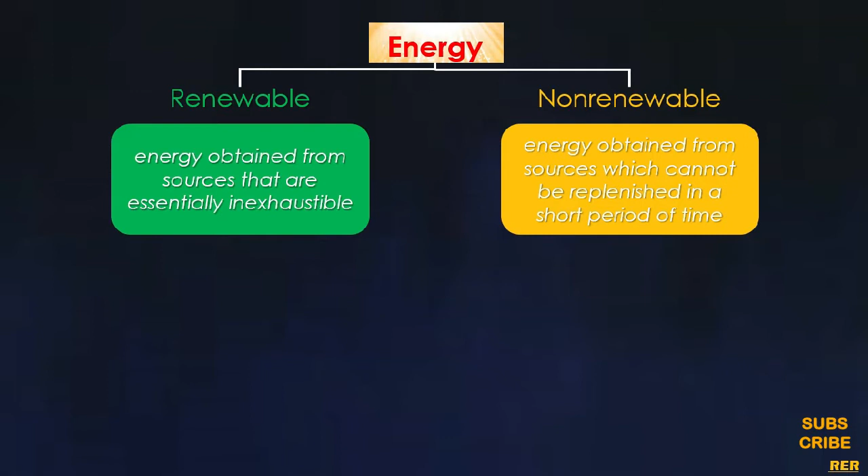Non-renewable energy resources are further classified as nuclear and fossil fuels. Nuclear energy is the energy stored in the nucleus of an atom, whereas fossil fuels are further classified as natural gas, oil, and coal.

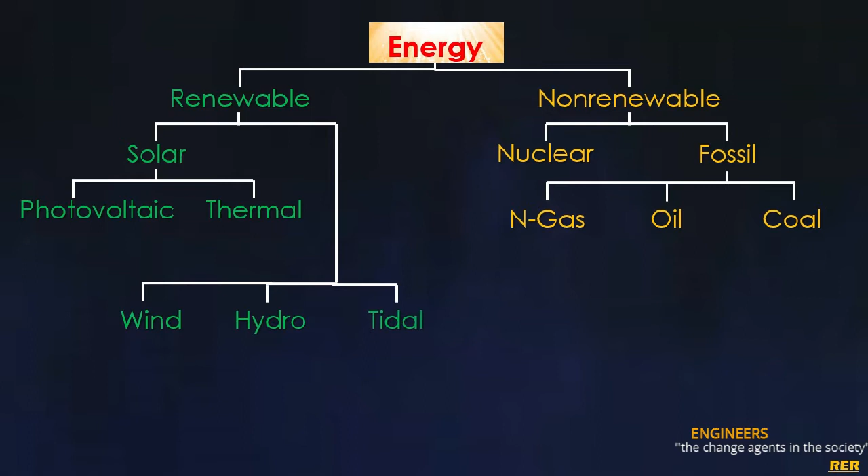Renewable energy resources are further classified as solar, which is subdivided into solar photovoltaic, which is the direct conversion of solar energy into electricity, and solar thermal energy; then hydro energy, the energy contained in the water; wind energy, the energy contained in the wind; tidal energy, energy associated with the tides of the sea; then biomass energy, and geothermal energy resources.

We can say that all forms of energy are forms of solar energy, less geothermal energy and nuclear energy, because these are the sources of energy which are associated with the energy stored in the nucleus of an atom. Other than these two energy resources, nuclear and geothermal energy, all forms of energy are solar energy.

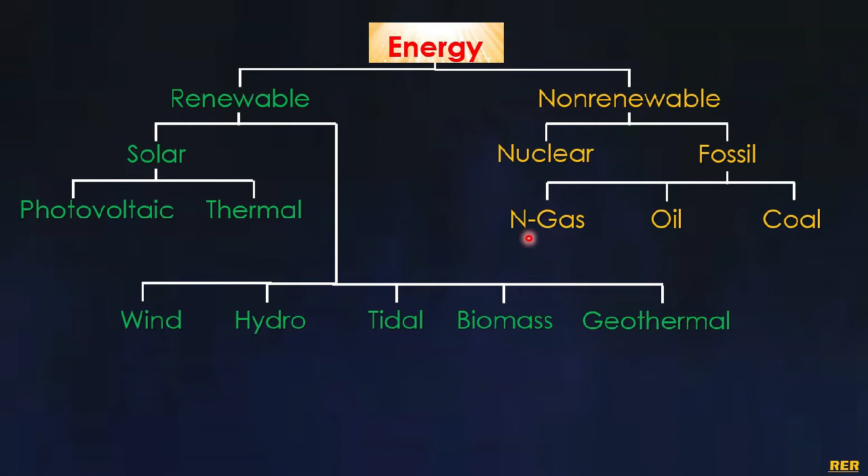Fossil fuels are also a form of solar energy because these are the old deposits of biomass which are buried deep in the crust, and because of the excessive temperature and pressure these are transformed into natural gas, oil, and coal.

Now talking about the history of energy usage. At the beginning of human life, our ancestors relied on renewable energy resources; humans lived on solar energy stored in food and other plants. They ate fruits, vegetables, and animals. Then they started burning wood for cooking food and heating purposes. So we can say before 1880 their reliance was on wood for energy.

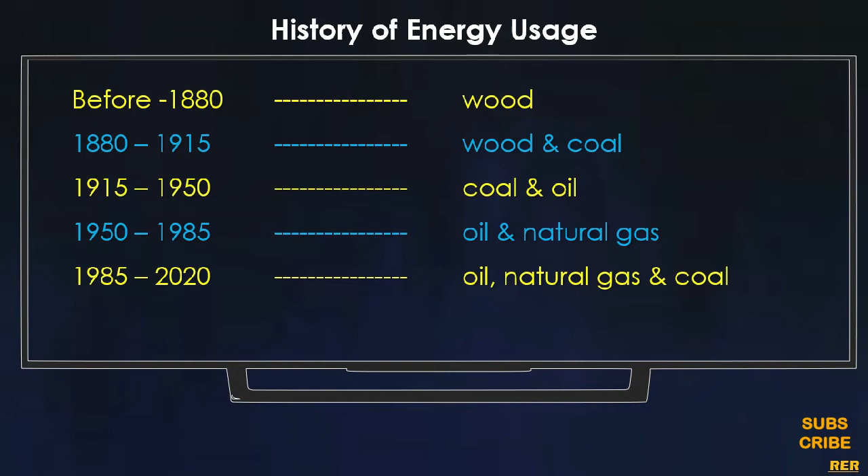Then during the period between 1880 till 1915 their reliance was on wood and coal. During the period between 1915 till 1950 they also discovered oil and started using coal and oil as a source of energy. Then from 1950 till 1985 their reliance was on oil and natural gas as a source of energy. Then during the period between 1985 till 2020 we are using oil, natural gas, and coal as a source of energy. Now, from 2020 onward, what is going to be the source of energy?

Now, let's compare the renewable energy resources with the non-renewable energy resources. Talking about the sources of energy, renewable energy sources are present in the local environment, whereas non-renewable energy sources are present in the form of concentrated stocks deep inside the crust of the earth. The state of renewable energy resources is current or incoming, whereas non-renewable energy resources are static stocks.

Intensity of renewable energy sources is very low as compared to the non-renewable energy sources, which are more than 100 kilowatt per meter square. Supply of renewable energy resources is infinite, meaning these are non-exhaustible, whereas non-renewable energy resources are exhaustible and finite. Capital cost for the installation of renewable energy resources is very expensive as compared to non-renewable energy resources. Variation in the generation of energy is fluctuating for renewable energy resources and steady for non-renewable energy resources.

Location of use is site specific for renewable energy resources, meaning it has to be used where it is located, whereas non-renewable energy resources can be used anywhere away from the location of the source. The scale of renewable energy resources is small or moderate, whereas it can be increased for non-renewable energy resources. The skill required for the design, integration and installation of renewable energy resources is interdisciplinary, and for non-renewable energy resources the skills are mechanical and electrical.

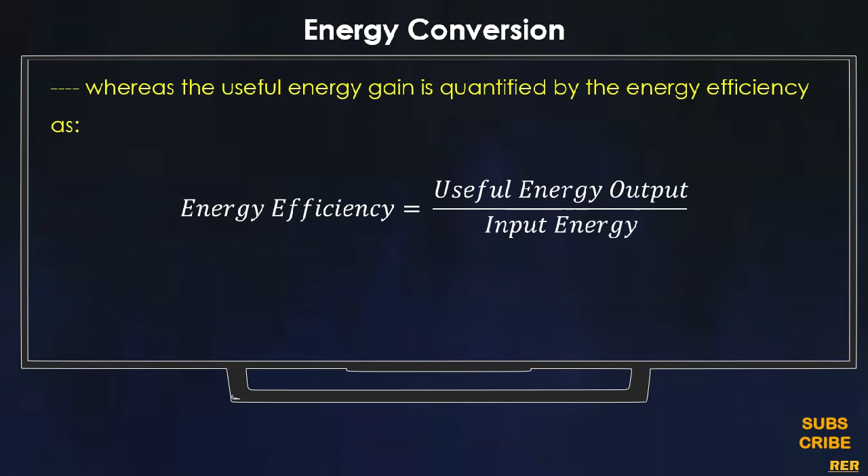The useful energy gain is quantified by the energy efficiency. Energy efficiency is the useful energy output divided by the input energy. If we see the example of conversion of coal to electricity, the first step is coal production. For that the efficiency is 0.96 and the cumulative efficiency would also be 0.96.

Then is the transportation of coal to the plant site. The efficiency is 0.97 and the cumulative efficiency would be 0.93. Then the boiler, coal to heat, the efficiency is 0.7 and the cumulative efficiency would be 0.65. Then the turbine, the conversion of heat to mechanical energy, the efficiency is 0.5 and the cumulative efficiency would be 0.33.

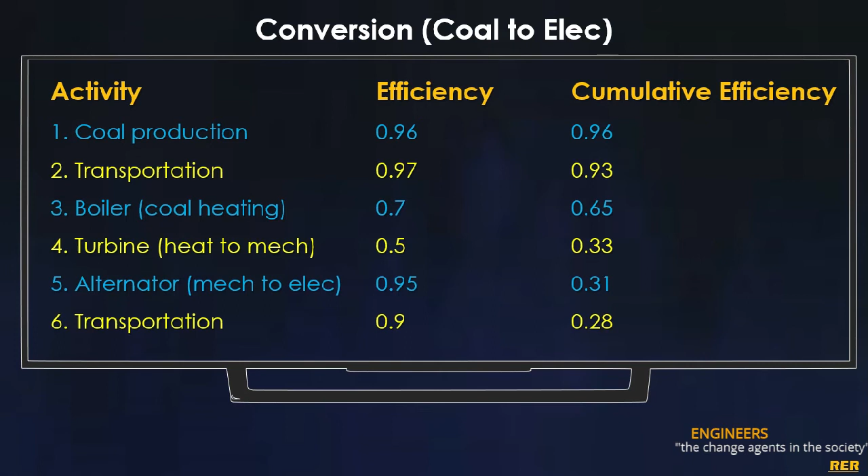Then the alternator, the conversion of mechanical energy to electricity, the efficiency is 0.95 and the cumulative efficiency would be 0.31. Finally, the transportation of electricity from the plant to the application site, the efficiency is 0.9 and the cumulative efficiency would be 0.28. So for the total conversion of coal to electricity and transportation to the site of application, the efficiency drops from 100% to 0.28.

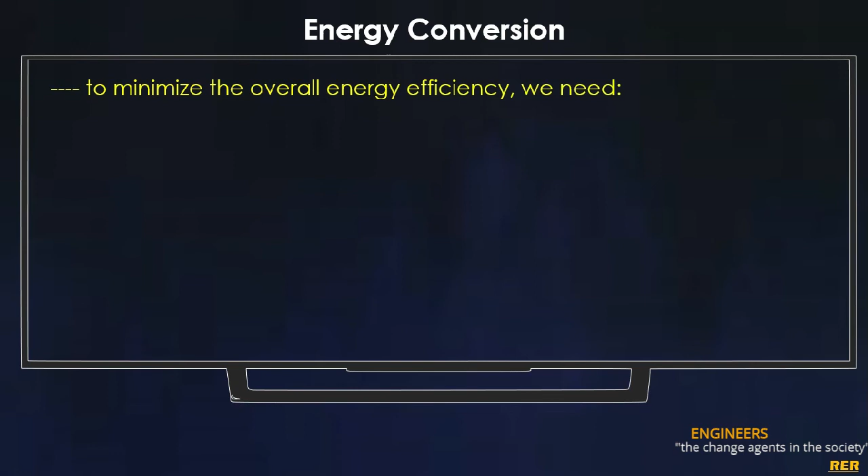Now to maximize the overall efficiency, we need to minimize the number of energy conversion steps and maximize the efficiency of each energy step.

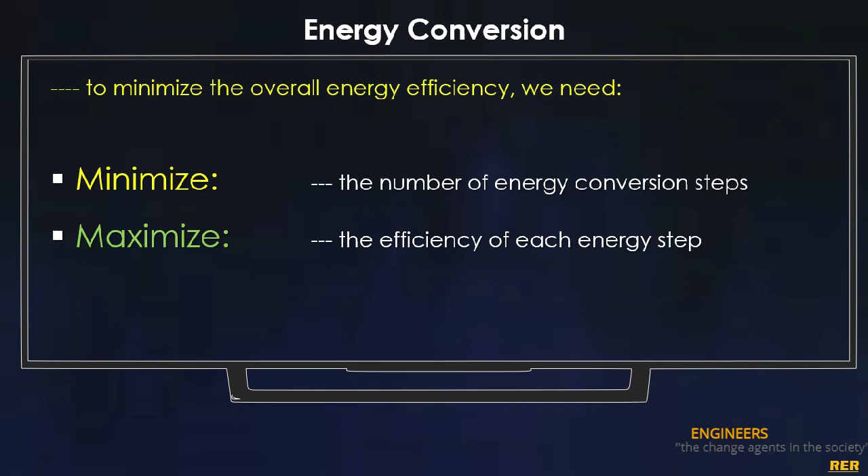Now let's see a very important definition, sustainable energy, which is defined as producing and consuming energy in a manner that meets the energy needs of the present without compromising the ability of future generations to meet their needs, which means generating and consuming only as much energy as is required to meet our present requirements, not more than that.

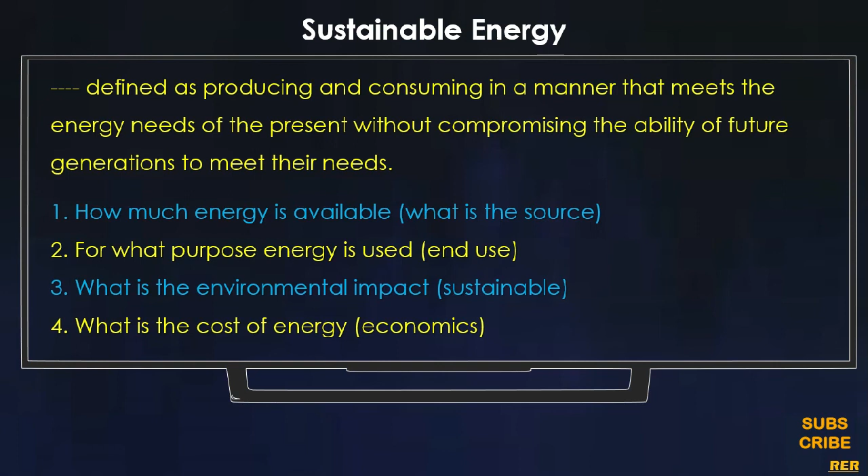When we are dealing with energy, there are four questions which are very important to address. First, how much energy is available, in terms of the resources we are tapping for energy gain? Then, for what purpose is the energy to be used, the end application of the energy? Then, what is the environmental impact, that is sustainability? Then, what is the cost of energy, the economics, whether it is going to be cost effective or not?

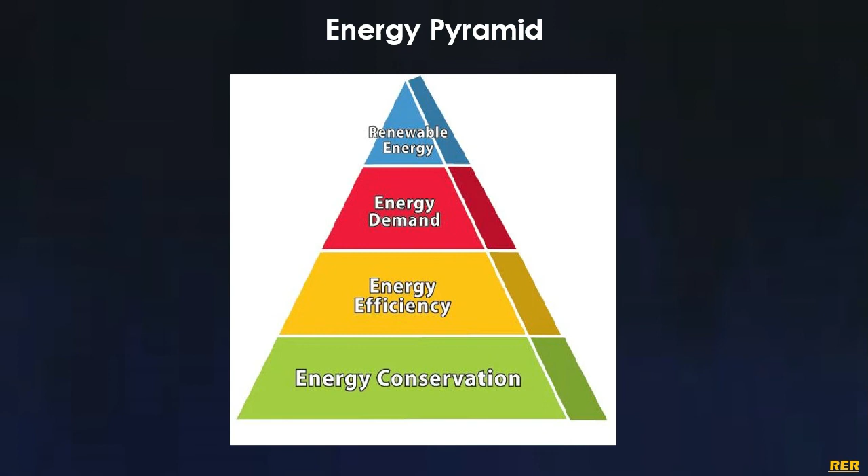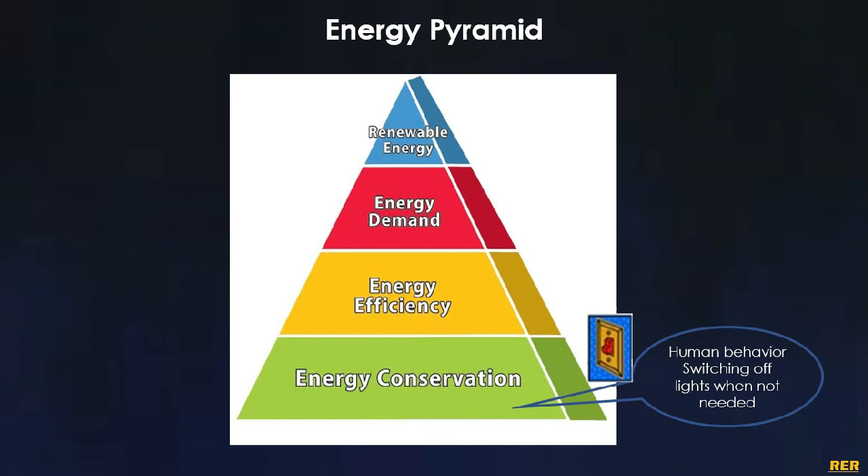Now let's see the energy pyramid. In the energy pyramid, first of all is energy conservation, that is human behavior, switching off lights and fans when these are not needed. Then energy efficiency, associated with the application of energy efficient appliances or energy efficient buildings. Then energy demand, shifting our demands from peak hours to normal hours.

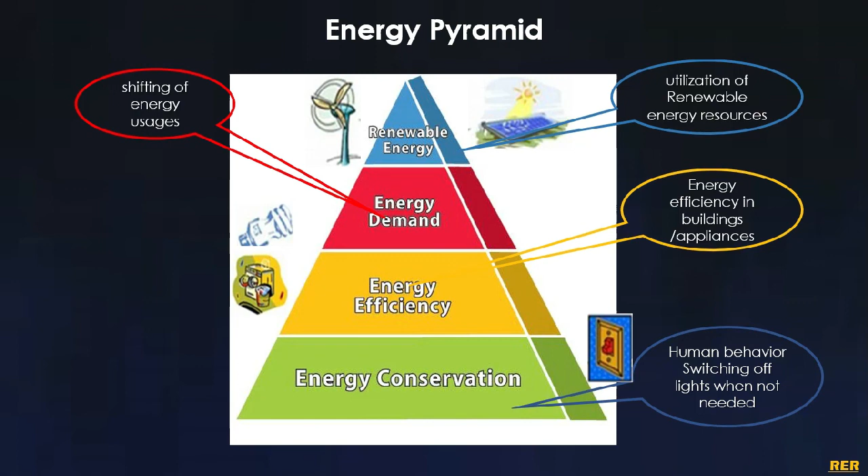And finally, renewable energy resources: we have to tap only the renewable energy resources which are not harmful for the environment. With this, we end our discussion here.